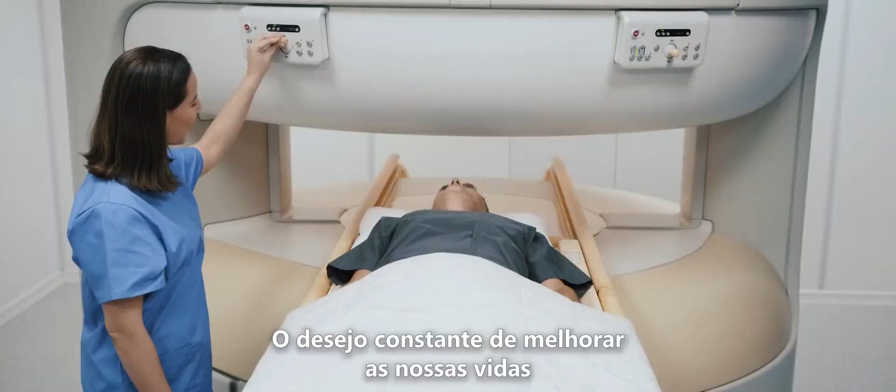Every day, we use things that are a result of innovative technology and inventions to make our life safer and more comfortable. The continuous desire to improve our lives has led to important advancements in our history.

VANGEST, a unique cluster of specialized companies, offers state-of-the-art solutions to high-demanding industries worldwide: automotive, aerospace, electro-electronics, food, and medical.

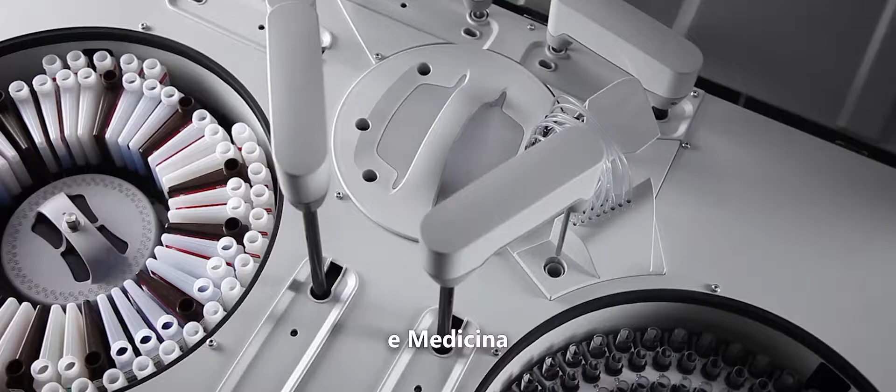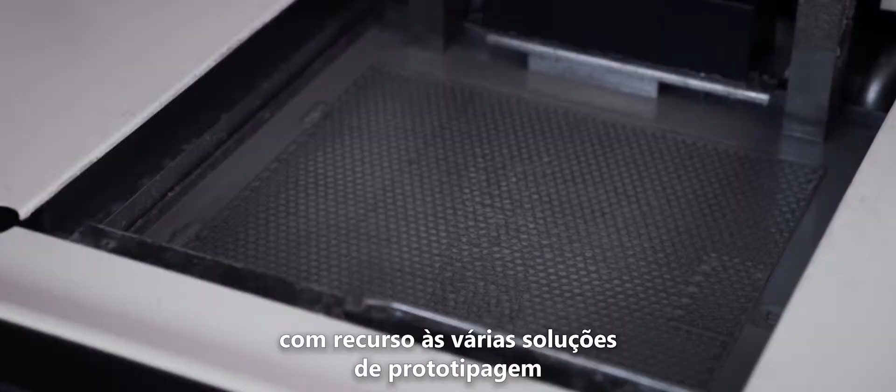Everything starts with good design. Taking a great idea to functional prototype with a variety of our rapid prototyping and rapid manufacturing solutions.

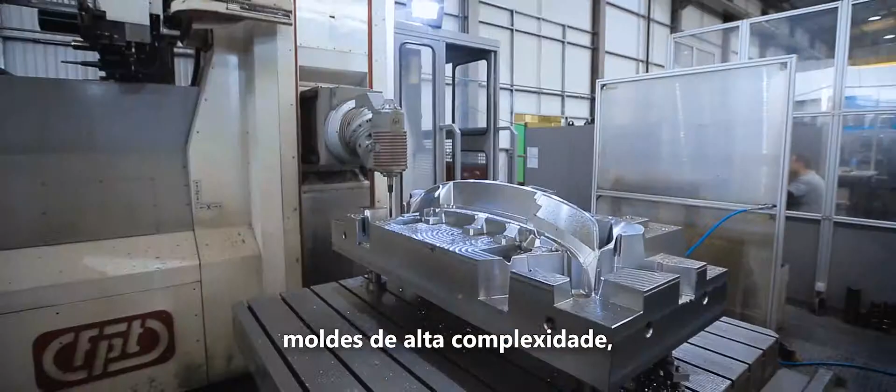In our state-of-the-art mold-making facilities, we design, engineer, and manufacture highly complex molds, from very small molds up to 35 tons big molds.

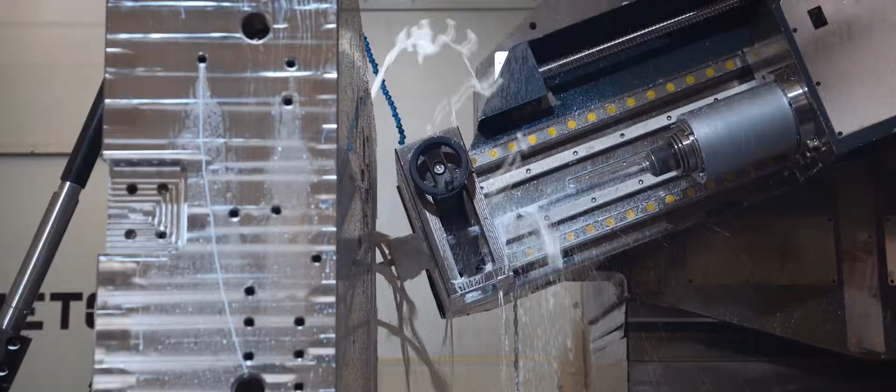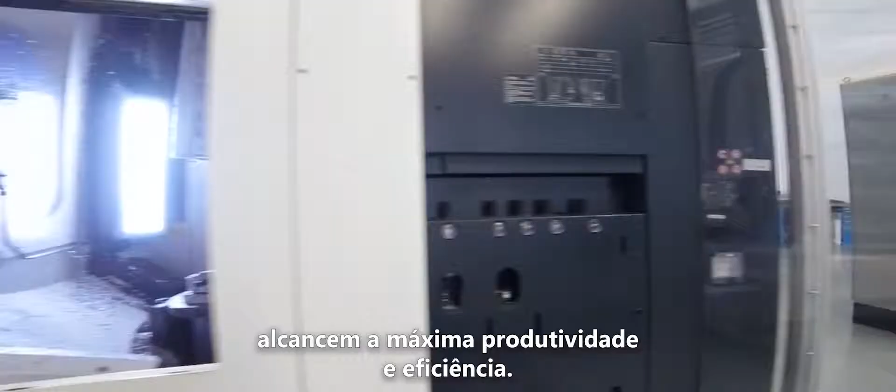High-performance and reliable molds are designed at our in-house development facilities. We adapt smart solutions to achieve maximum productivity and efficiency in our products.

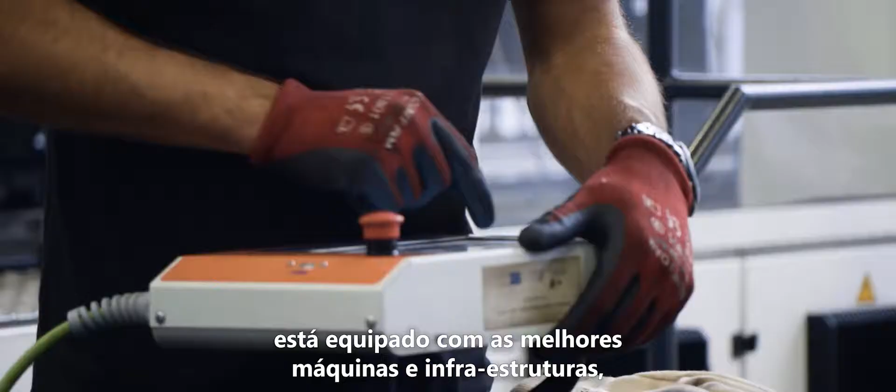Our testing and validation center, one of the largest in Europe, is equipped with the best-in-class machinery and infrastructure to test and validate a diverse range of our injection molds.

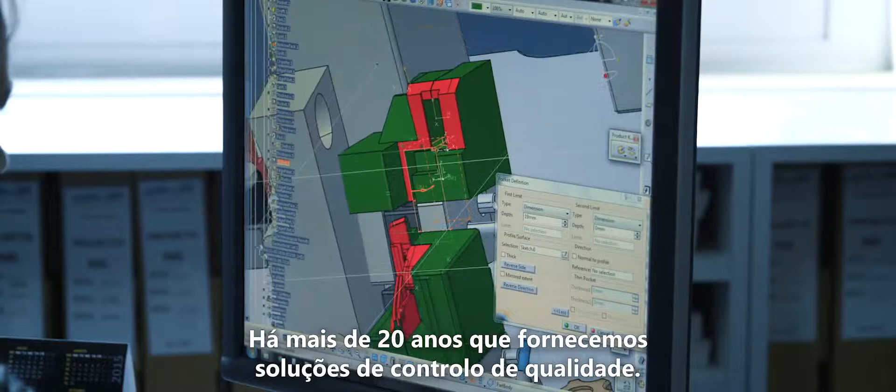For over 20 years, we have been providing quality control solutions for the industry. In our advanced checking fixture development facilities, we offer innovative ideas for quality control of complex parts and mechanisms.

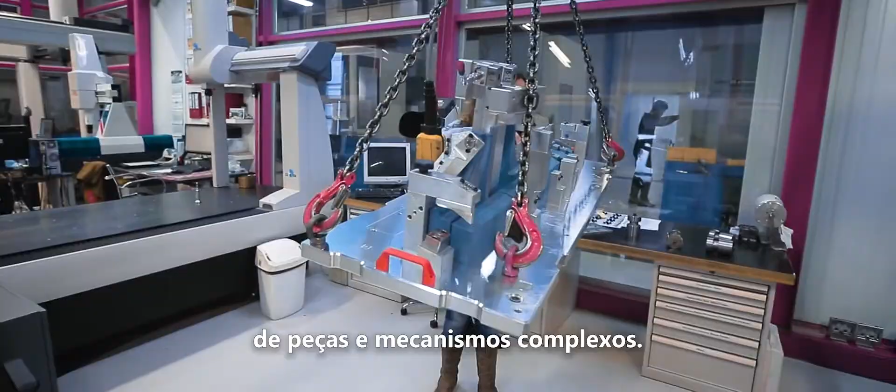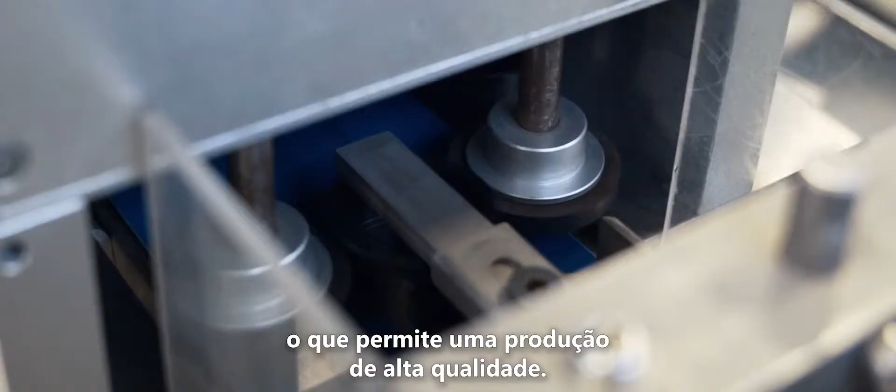VANGEST Injection Molding Factory provides high-quality production using exclusively electric injection machines. High quality and on-time delivery can only be achieved with high standards and constant focus.

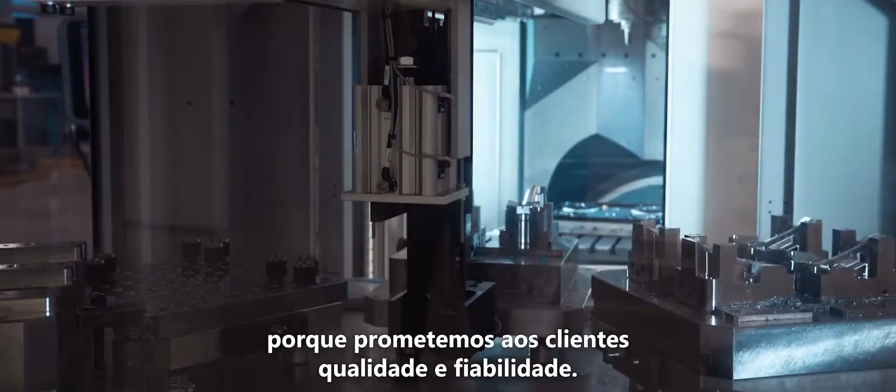Because we always promise you consistent quality and reliability, we employ the highest levels of project management techniques to consistently achieve great results.

Our people remain the most valuable part of our success. The health and safety of our people is our priority.

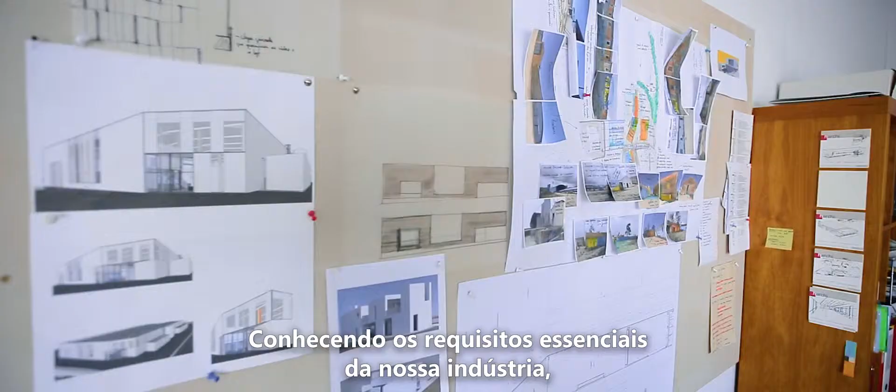Knowing the very essential requirements of our industry, we created a modern and environmental friendly infrastructure to maximize productivity in whatever we do. And we strive to continuously improve our dynamic workplace.

We put forth passion for life, passion for precision.